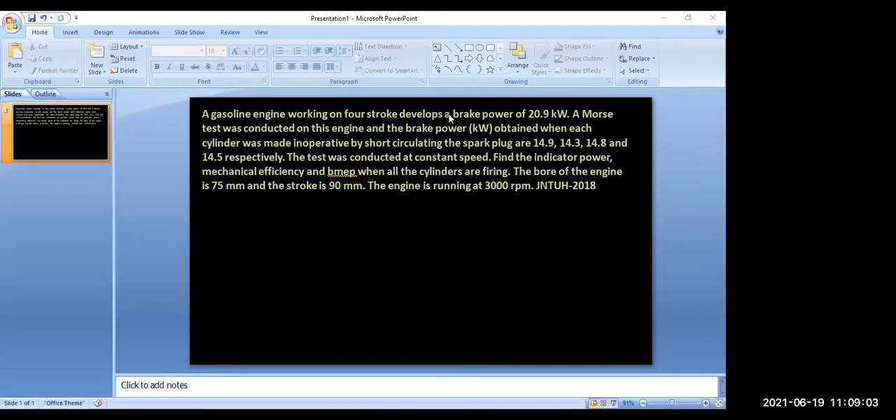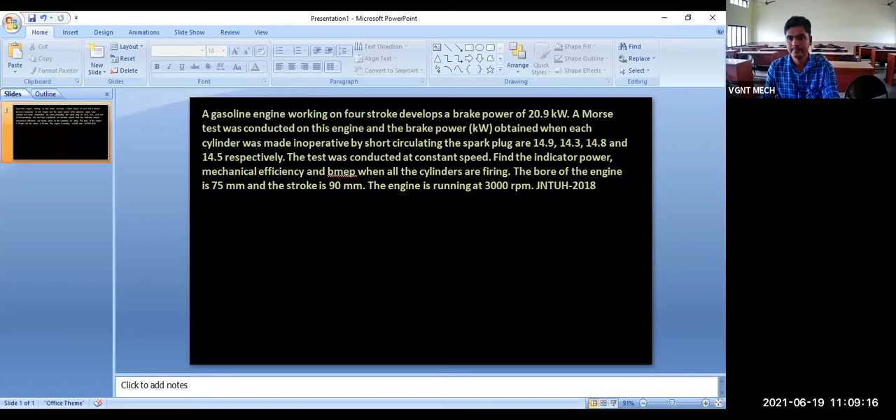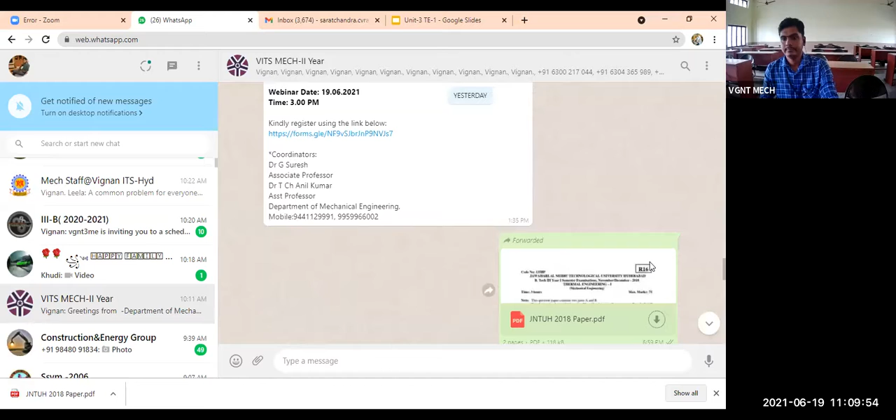Okay, so yesterday, let me show you. Yesterday, one question I have kept in a group. So this question I have kept in the group yesterday, and I told you to solve question number 7B and send me the answer. But interestingly, many of you have solved this question and I got lots of response.

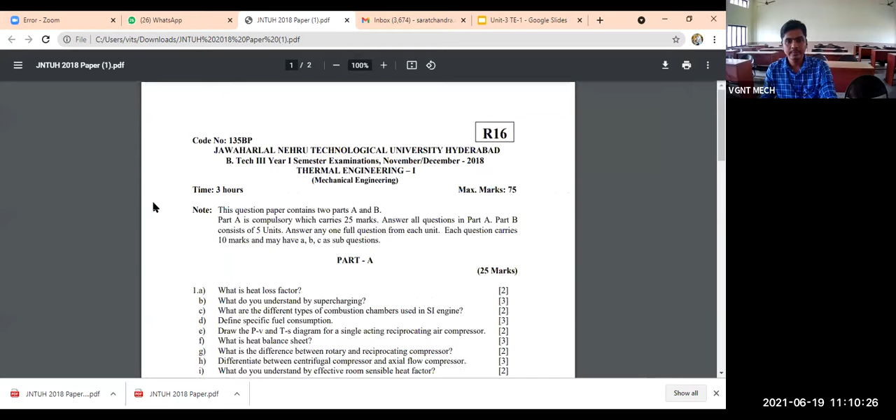Many of you sent this question. So I am very happy that you are practicing all this question at home and you are sending the answers also. This question number 7B, 2018 question number 7B. This question I have given yesterday to solve at home. 5 marks question it was, and after solving I told you to send me the answers.

Out of 78 students, only one student sent me the answer. Only one. Roll number 313, I think. Sudhir Kumar, roll number 313. Yes, right. Only one answer I got, 313.

So if you will do it, it will be your benefit. If you will not do it, it will be your loss. I have nothing to do with it. So I am here to teach you. I am here to guide you. It is up to you whether you are listening or not. I am doing my job by teaching you.

I am getting my salary by teaching you. Your father, your parents are doing their job by paying money for you. Everybody is doing their respective jobs. But what are you doing? Are you doing your job correctly? Okay, so think about it.

There are lots of excuses. I am not going to ask anybody because I know you can give lots of excuses. Sir, my health was not good. Sir, I was in village. I have network issue. I have current issue. I have COVID issue. Like lots of excuses you will give, but hardly it will take 5 to 10 minutes to solve this question. Hardly 10 minutes it will take.

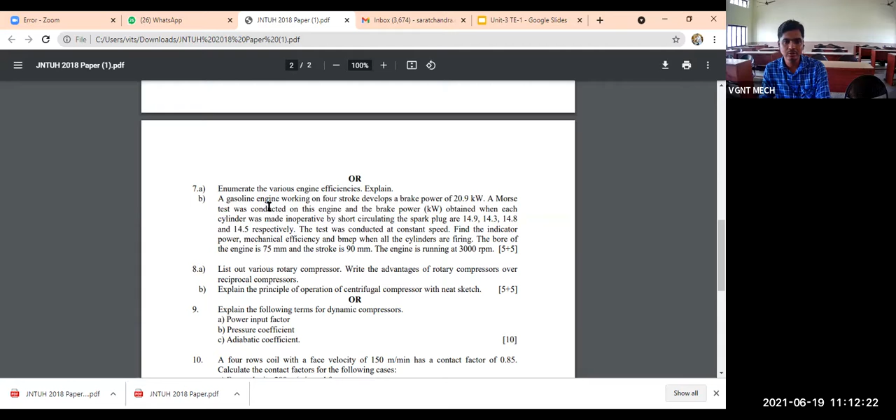Exactly one similar question we have done in the class. And to solve this question, hardly 10 minutes it will take. But you are so busy there. I think you are busier than the Prime Minister of the country. You are so busy that you do not have 10 minutes also to spend for this question. Or I don't know whether you are finding it irrelevant.

Okay, your exam will be on July last. Hardly 1.5 months is there. 1 month or 1.5 months is there. Either it will be on July last or August 1st. I'm talking about your final external exam. It will be offline, it is not online. You have to choose the college. You have to go to the college and you have to write the offline paper.

Mostly on July last or on August 1st, you will be having the final semester exam. Okay. And if you are not serious, nobody can help you. If you cannot help yourself, nobody in this world can help you.

Each and everyone are doing their job in this pandemic. As a faculty, we are doing our job. As parents, your father and your mothers are also doing their job. But I don't know what you are and what you are doing at home, that you do not have 10 minutes also to solve this question.

Anyway, I have nothing to do with it. My job is to teach you and to get the salary. Whether you study or not, nothing is going to happen. You are the only person who is going to suffer if you will not listen to the faculty, believe me. And nowadays, in the mechanical branch, the job security is very pathetic during this pandemic.

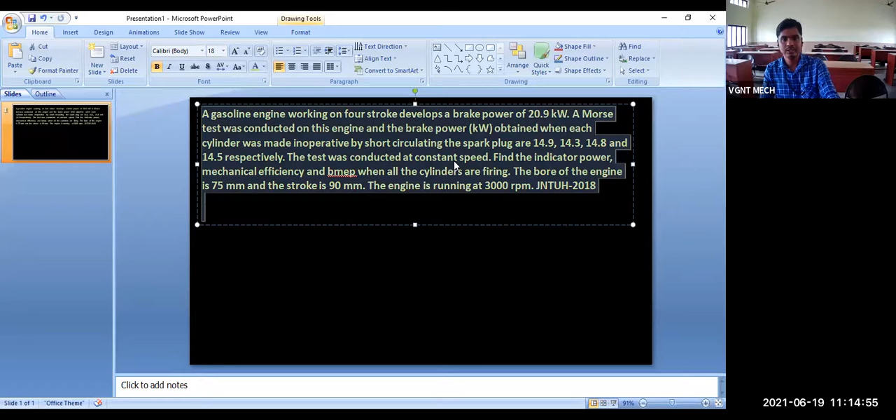So what we are going to do now is we will solve this question and we will close it. So this was the question that I am talking about. This question I have put in the group yesterday. Only 313, I think he has solved this question. Nobody else has done it. So once we will discuss it quickly, then we will switch over to our next topic. So what I will do, I will put his solution over here.

Sir, offline classes started there. Offline classes mostly by next month it will start, from July 1st, mostly they are planning to do the offline class. It is not guaranteed, you will get the notification before 4-5 days, but mostly from July 1st they are planning to start the offline classes.

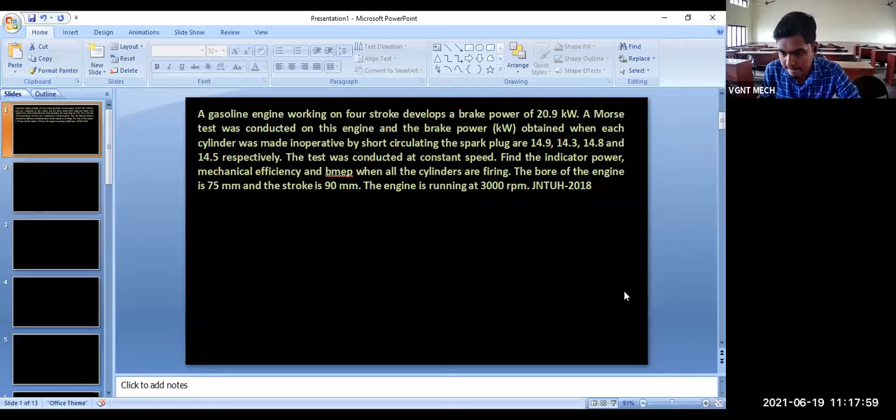So in this question, a gasoline engine working on 4-stroke develops a brake power of 20.9 kilowatt. So brake power directly it is given. Quickly I will solve this question because yesterday exactly similar type of question we have solved, and because they have asked this question in the previous year paper, so that's why I have given

you this question to do it at your home. But since I didn't get enough responses from your side, so I have to do it. So brake power of the engine is given 20.9 kilowatts, this is total brake power, equal to 20.9 kilowatt. A Morse test was conducted on this engine and the brake power obtained when each cylinder was made inoperative by short circuiting the spark plugs are 14.9, 14.3, 14.8 and 14.5 respectively.

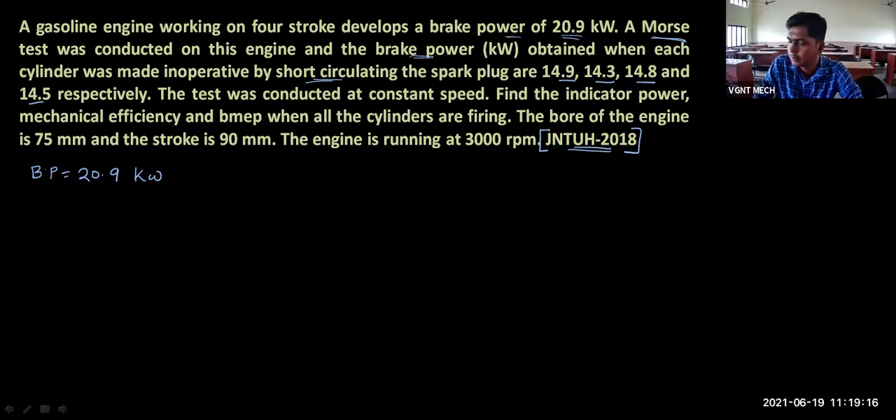What it is telling, so a Morse test was conducted, and when conducting the Morse test, some brake power value it is obtaining. And what are the brake power it is obtaining? By short circuiting - short circuiting means cut off - by short circuiting the cylinder, these are the brake power we are obtaining.

So 14.9 is brake power 1 when we are short circuiting the first cylinder, so BP1 equal to 14.9 kilowatt. Then BP2 is 14.3 kilowatt. Then for third engine BP3 is 14.8 kilowatt. And for fourth engine, BP4 is 14.5 kilowatt.

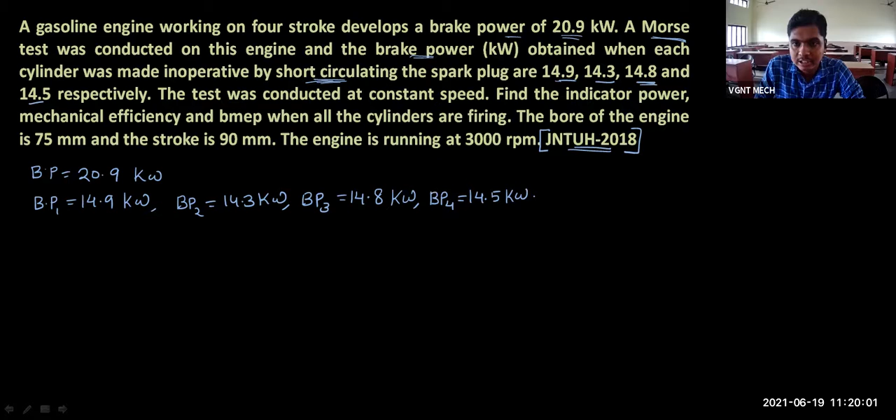The test was conducted at constant speed. Find the indicated power - so we have to calculate indicated power, this is one point we have to calculate. Next, mechanical efficiency - mechanical efficiency we have to calculate in the second part. And third one is brake mean effective pressure, BMEP. These three things we have to calculate when all the cylinders are firing.

The bore of the engine is 75 millimeter. Bore means it is diameter, so diameter of the engine, that is small d, this is equal to 75 millimeter, and we have to convert this into meter, so we have to divide it by 1000. If you will divide by 1000, you will get 0.075 meter. And the stroke length is 90 mm, so stroke length, that is small l, is equal to 90 mm or 0.09 meter, you divide it by 1000, you will get in meter.

And the engine is running at 3000 RPM, so speed of the engine, that is capital N, equal to 3000 RPM. So this many things are given in the question, and what you have to calculate - you have to calculate indicated power, you have to calculate mechanical efficiency, and you have to calculate brake mean effective pressure.

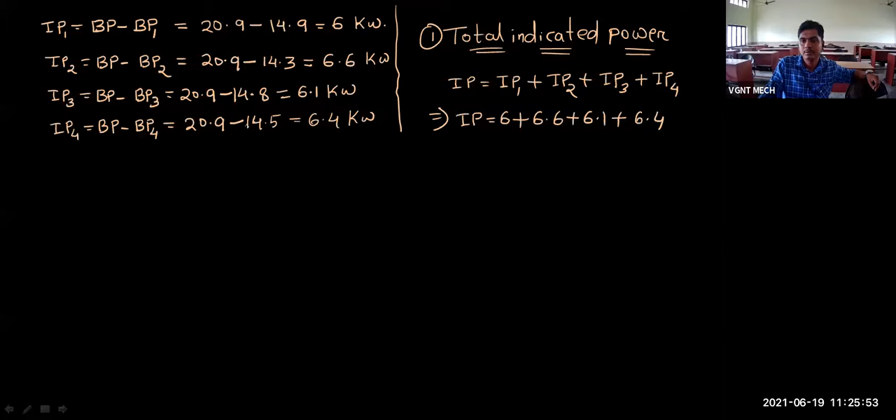Now, if you substitute the values, IP1 is 6 plus IP2 is 6.6 plus IP3 is 6.1 plus IP4 is 6.4. So if we will solve all these things, we will get 25.1 kilowatt. I think it is correct, let me check the answer. Yes, 25.1 kilowatt. Okay, this is the total indicated power we have calculated.

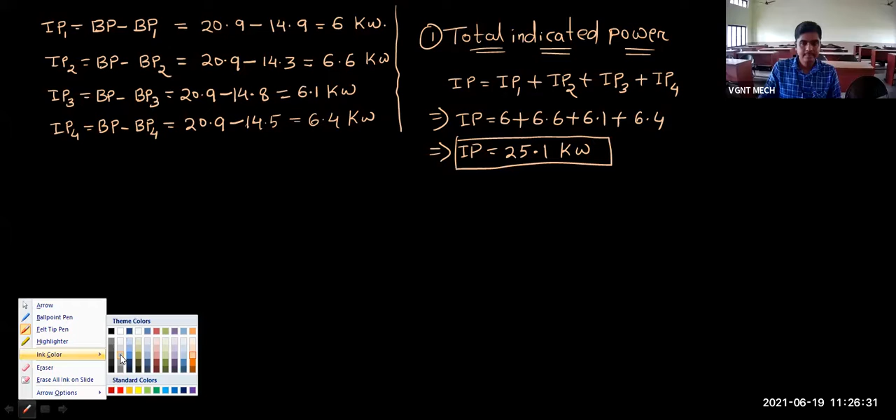Now next one is we have to calculate the mechanical efficiency. How to calculate mechanical efficiency? Second point, we have to calculate mechanical efficiency, represented as eta mech. So what is the formula to calculate mechanical efficiency? Mechanical efficiency formula is brake power divided by indicated power into 100.

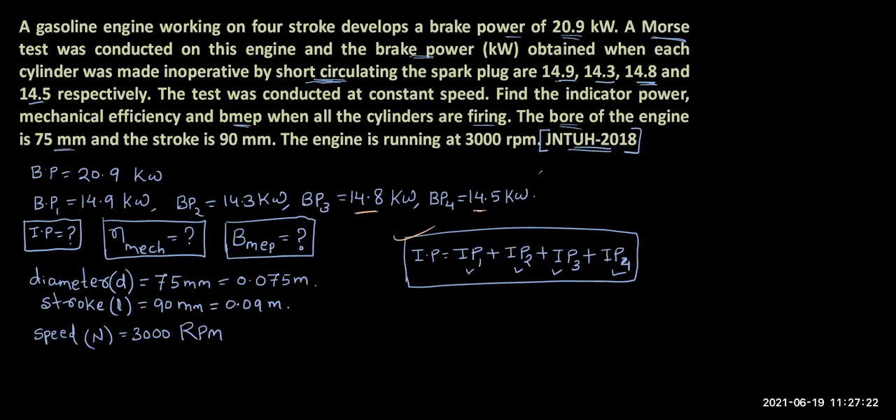Okay, this brake power means it is the total brake power. This indicated power means it is total indicated power. So total brake power is 20.9 whole divided by total indicated power, which we have got 25.1, into 100.

We'll solve this. Yes, 83.266 we will get. If we solve this, we will get 83.266%. Okay, yes, 83.266, correct. Okay, so this is mechanical efficiency.

What is the last term? Last one is we have to calculate brake mean effective pressure. So at the last point, we have to calculate brake mean effective pressure. So to calculate brake mean effective pressure, we have to apply the formula: brake power equal to small n into pressure into L into A into N, whole divided by 60,000.

This formula you have to apply. Always remember, whenever they are asking you to calculate brake mean effective pressure, this formula you have to apply. If they ask brake mean effective pressure, you write here brake power. If they ask you to calculate indicated mean effective pressure, then here you write indicated power. The formula remains same. When this is brake power, this is brake mean effective pressure. If you write here indicated power, then we get indicated mean effective pressure. The remaining formula remains exactly same.

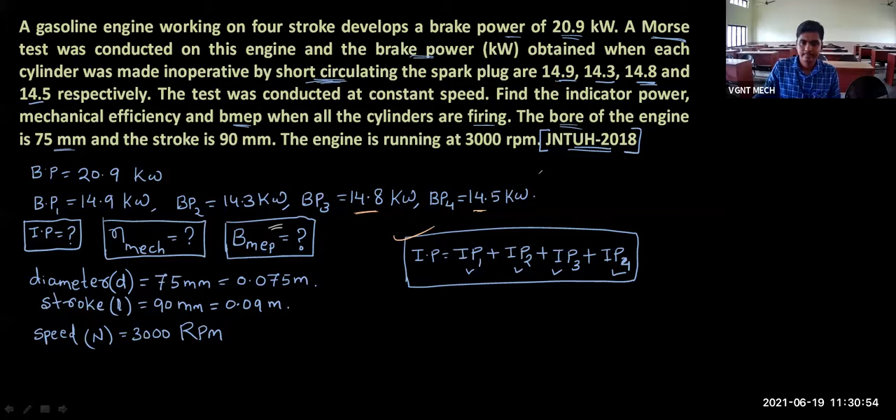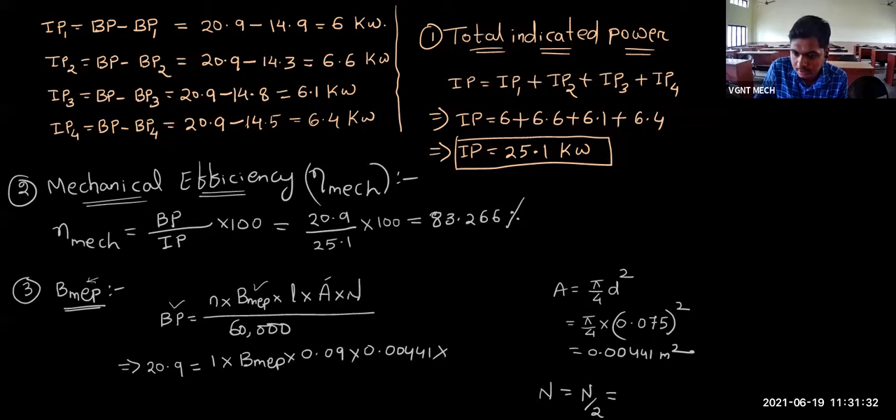Since it is a 4-stroke engine, you have to see, this capital N is nothing but N by 2. What is the N value? N value was 3000. So it will be 3000 divided by 2, that is equal to 1500. So N value is 1500.

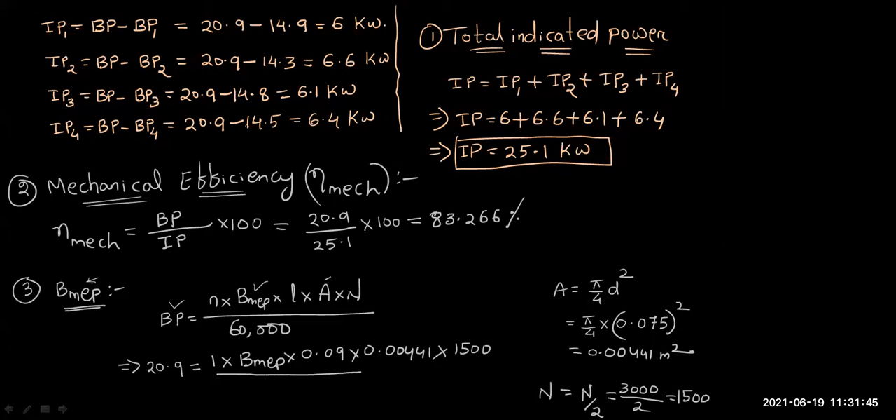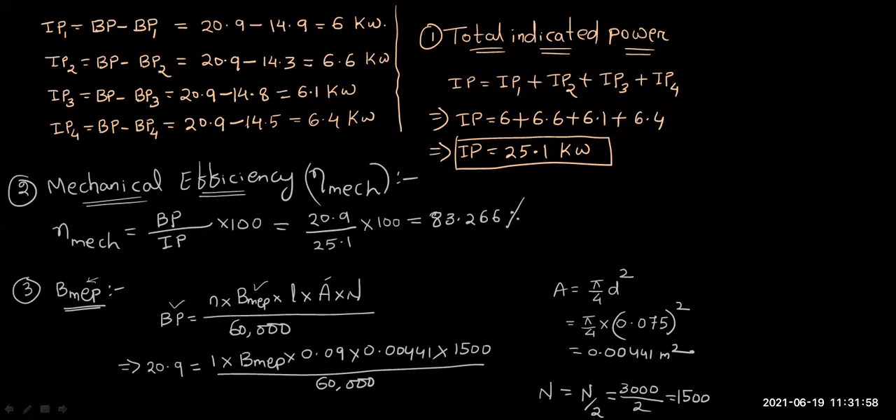Whether it is indicated power or brake power, if you are applying this formula, then in place of this N value, you have to write N/2 if it is a 4-stroke engine.

Actually, for this brake power, you have two formulas. Either you can calculate brake power equal to 2 pi NT divided by 60,000. So in this way directly you can calculate brake power. Here no need to put N/2 in place of N. Directly N value you have to put here.

To calculate brake mean effective pressure, this is the formula: small n into BMEP into small l into A into N, whole divided by 60,000. When this pressure term will come, in that case, in place of N, you have to put N/2 for a 4-stroke engine.

Similarly, when you are calculating indicated power, what is the formula? N into indicated mean effective pressure into L into A into N, divided by 60,000. In that case also, in place of N, you have to put N by 2 if it is a 4-stroke engine.

So you remember, whenever you are applying this pressure formula, whenever you have to calculate pressure values, in that case only, in place of N, you have to put N by 2 if it is a 4-stroke engine. If it is a 2-stroke engine, N will remain same. Except this formula, everywhere else, same N value you have to keep.

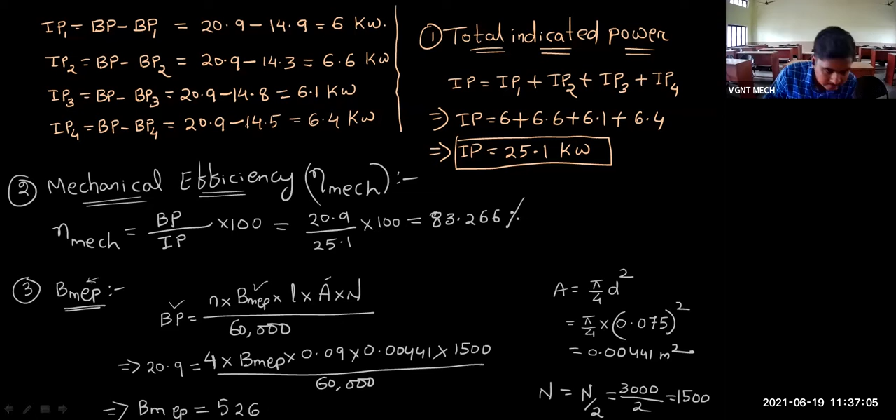Yes, 526, right? Something like that we'll get. It will be 526,581.0028 Newton per meter square, or equal to 5.265 bar. Okay, like this one answer we will get.

Here number of cylinder is 4. Why 4 cylinder? Let me tell you once again. Because you can see 4 brake powers are given. This is brake power of cylinder 1, 2, 3, and 4. Similarly, here also this is indicated power for cylinder 1, 2, 3, and cylinder 4. So that's why we have 4 number of cylinders. So this N value is 4. You solve this accordingly and we will get the answer.

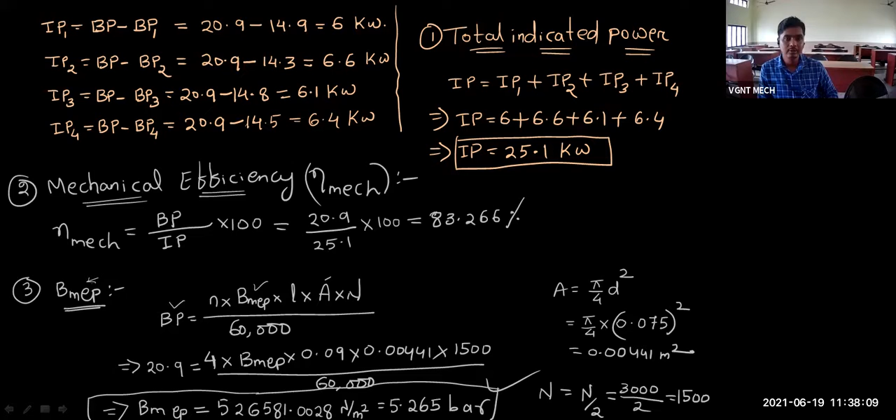Okay, so there is a probability of doing mistakes. See, I have also done the mistake. Initially, I have taken n equal to 1, but n equal to 4, because there are 4 cylinders.

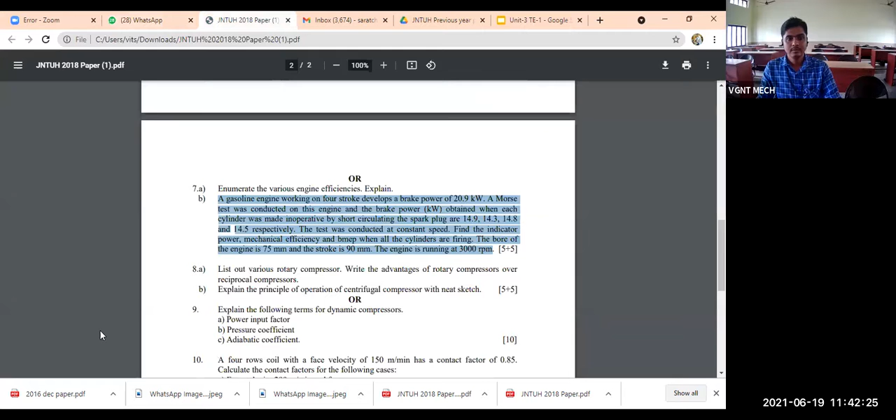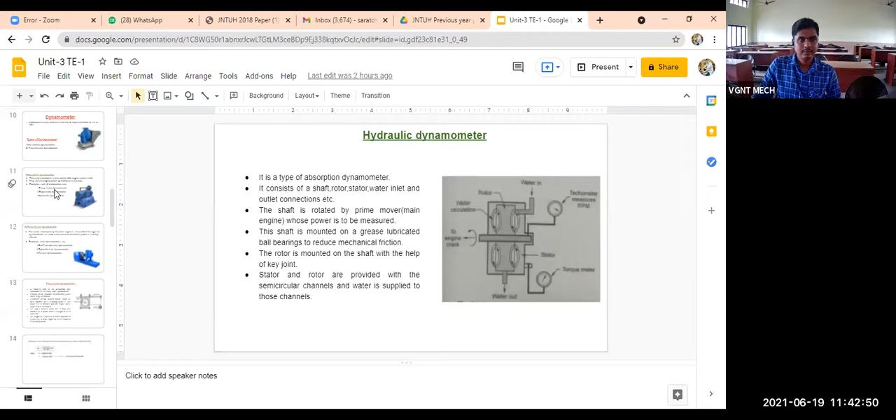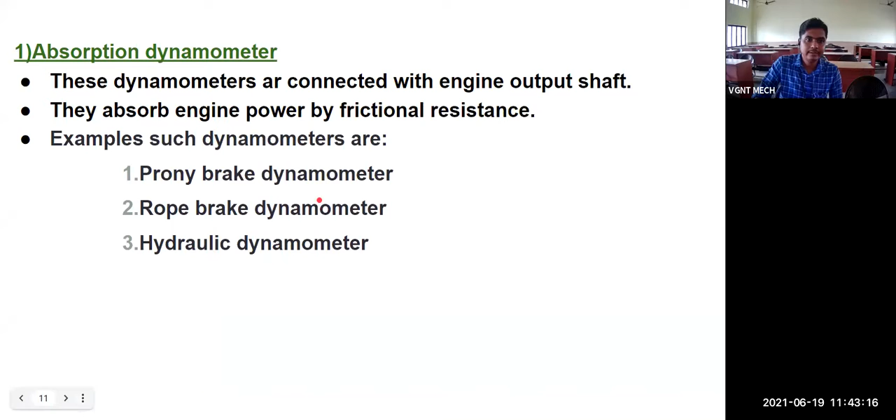So now we will switch over to our next topic. I think we have done enough problems from this. Now we will see some theoretical parts. So yesterday we have seen regarding Morse test, by using which we discussed how to find out the frictional power as well as indicated power. So today what we are going to do, today we will see how to calculate the brake power.

So our today's aim is we have to calculate the brake power of the engine. How to calculate the brake power, that we are going to discuss today. By using this dynamometer, we can calculate the brake power of the engine. So what is a dynamometer? A dynamometer is a device which is used to measure the torque and rotational speed of the engine.

Okay, because what is the formula to calculate brake power? Brake power you can calculate by applying the formula 2 pi NT divided by 60,000. So to calculate brake power, you have to calculate speed of the engine and torque of the engine. If these two things you can calculate, then you can calculate the brake power of the engine. So this dynamometer is used to calculate these two things: to calculate the torque and to calculate rotational speed. Rotational speed means this N value, and torque is nothing but capital T.

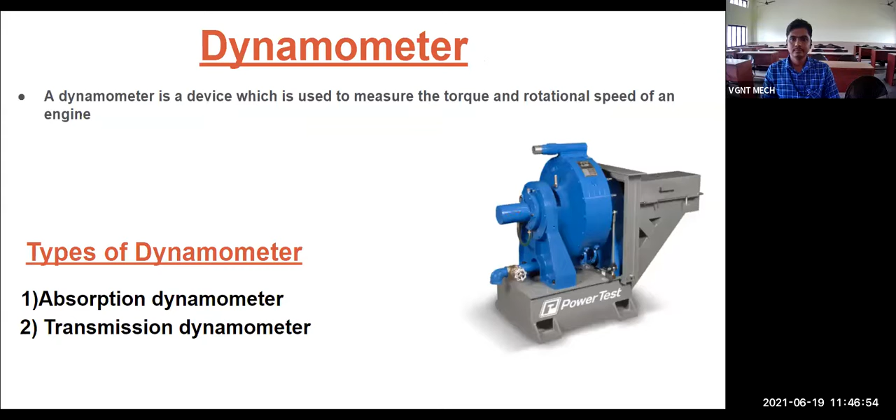In absorption type dynamometer, these dynamometers are connected with the engine output shaft. This dynamometer is directly connected with engine output shaft, and they absorb the engine power by frictional resistance.

The output shaft of this dynamometer is connected with the engine shaft. When the engine shaft rotates, this output shaft of the dynamometer will also proportionally rotate, and there will be some friction between the shaft and bearing. This frictional resistance will come into picture, and this dynamometer will absorb this frictional resistance value, capturing it, and from this frictional resistance it will measure the power of the engine.

This is the principle behind it. That's why the name is absorption type dynamometer - it will absorb the frictional resistance between the shaft and the bearing, and from this frictional resistance it will measure the engine power.

It has 3 categories: first one Prony brake dynamometer, second one rope brake dynamometer, and third one is hydraulic dynamometer.

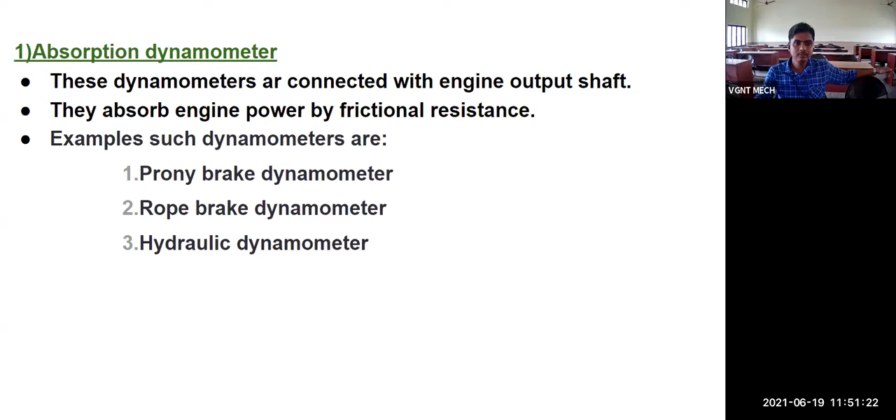Okay, so we have discussed what do you mean by dynamometer, and the different types of dynamometer. These are 2 or 3 marks questions they will ask regarding this.

Absorption type dynamometer is of 3 types. This diagram you are seeing is an absorption type dynamometer. And the last one is transmission type dynamometer.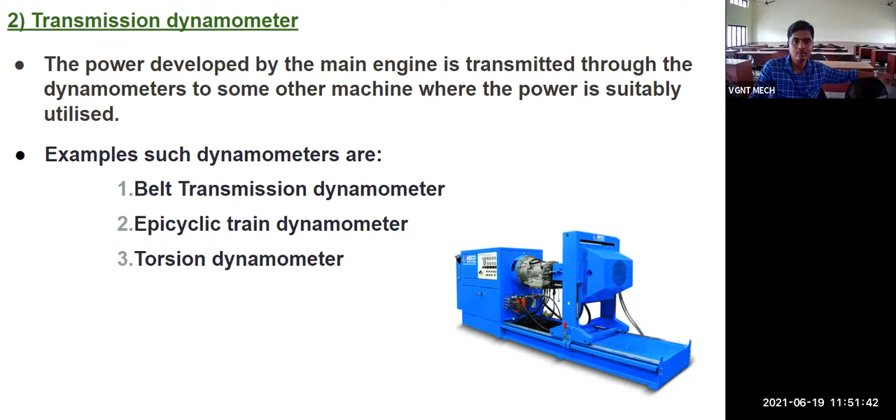In transmission type dynamometer, there are 3 categories of transmission type dynamometer. We will only discuss the absorption type dynamometer here, which has 3 categories: first is Prony brake dynamometer, second is rope brake dynamometer, third is hydraulic dynamometer.

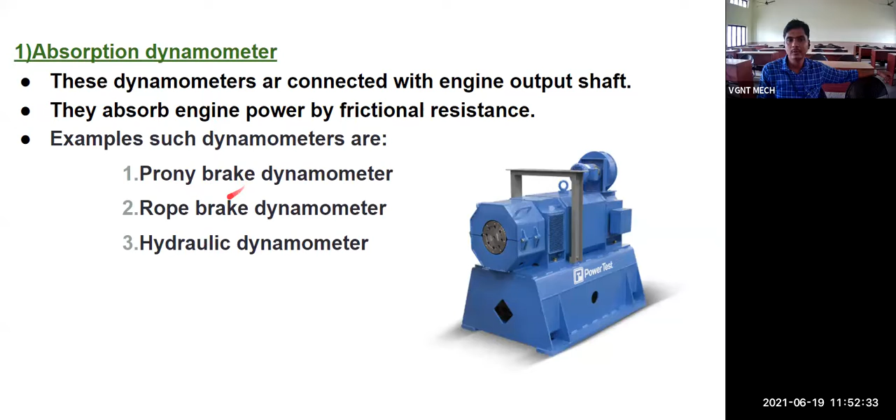In exams, they will ask theoretical questions like explain the working principle of Prony brake dynamometer for 5 marks, or explain the working principle of rope brake dynamometer, or hydraulic dynamometer. But mostly they ask about rope brake or Prony brake - these first two are most important. So we are going to discuss these 3 parts now: Prony brake dynamometer, rope brake dynamometer, and hydraulic dynamometer.

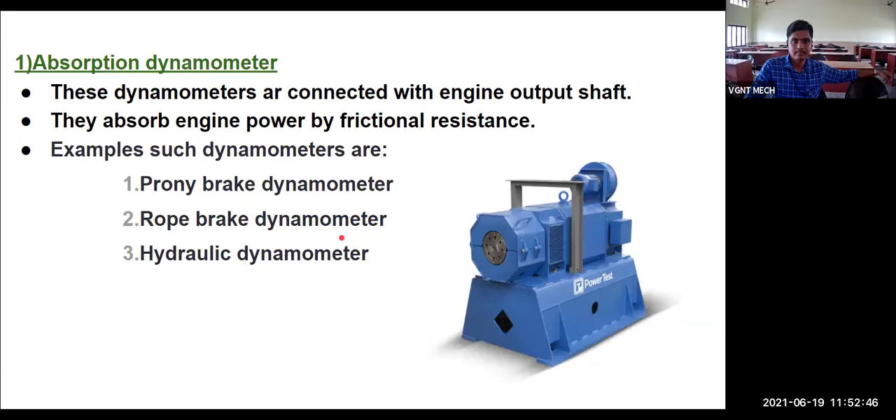First one is Prony brake dynamometer. It is the simplest form of absorption type dynamometer. It is a category of absorption type dynamometer.

Second point: it works on the principle of converting power into heat by dry friction. Whatever power is generated from the engine cylinder, this dynamometer will convert that power into heat, and it will measure the heat. How is power converted to heat? By friction - whenever there is friction, heat energy is generated. And how does this friction come? Whenever the shaft or the flywheel of the dynamometer rotates, there will be friction between this shaft and this block.

Due to this friction between the shaft and block, whatever power is in the engine gets converted to heat energy, because this shaft is connected with the engine cylinder. When the engine rotates, that engine power rotates this shaft or flywheel, and friction occurs at this interface between the flywheel and the block. So the power in the shaft is converted to heat energy due to this friction, and we measure this heat energy to calculate the power of the main engine.

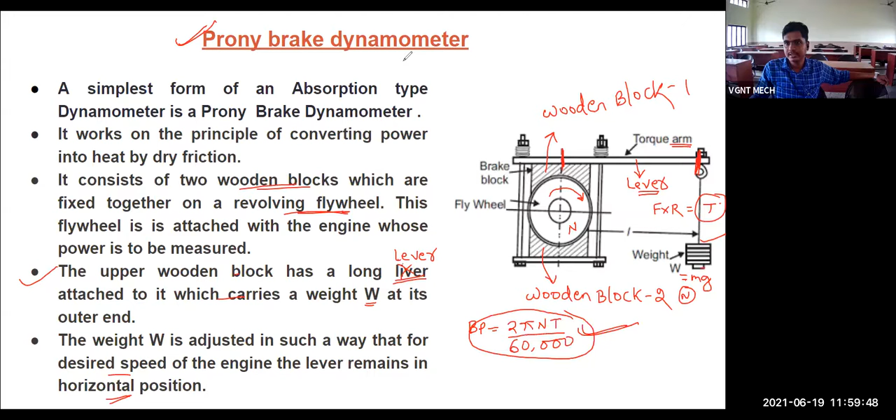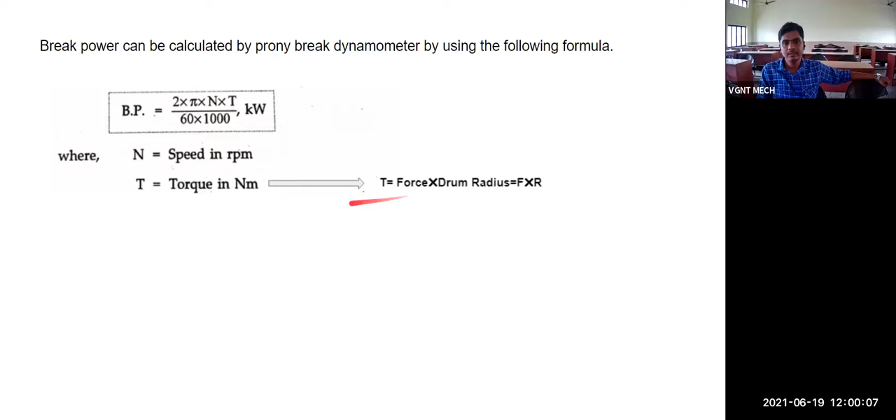This is the construction and working principle of the Prony brake dynamometer. By this method we calculate the brake power: brake power equals 2 pi N T by 60,000, where N is the speed of the engine and T is the torque, which is force into radius, the drum radius.

This formula you already know, and this is the method by which we derived it. From the flywheel we get the speed N using a tachometer, and from here we get the load or force, with this distance being capital R. So from here we get the torque, which is why this is called lever or torque arm. By multiplying this speed with this torque, we get the brake power in this formula.

That is all about the Prony brake dynamometer. Regarding the rope brake dynamometer, we will discuss tomorrow.